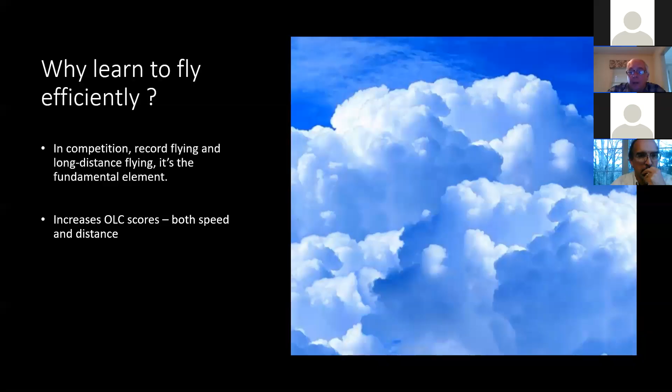Certainly in competition, in record flying, and in long distance flying, being efficient is the single most important thing. Gary Ittner, the American racing pilot, once said that competition flying is simply a process to determine who is the most efficient pilot of the group. In addition, if you're interested in OLC, by flying efficiently you will increase your OLC scores both for speed and distance.

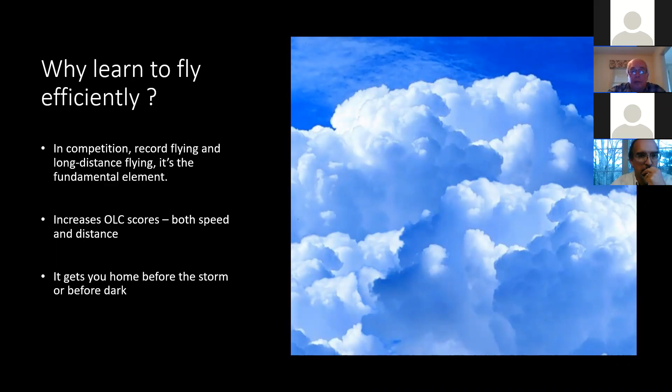Very often when the day is changing, flying efficiently is going to get you home before the storm or before dark. And it gets the most out of your glider and out of the day. I hope you all did read the John Cochrane article where his starting point is maybe you don't need a new glider, you just need to fly yours better and more efficiently.

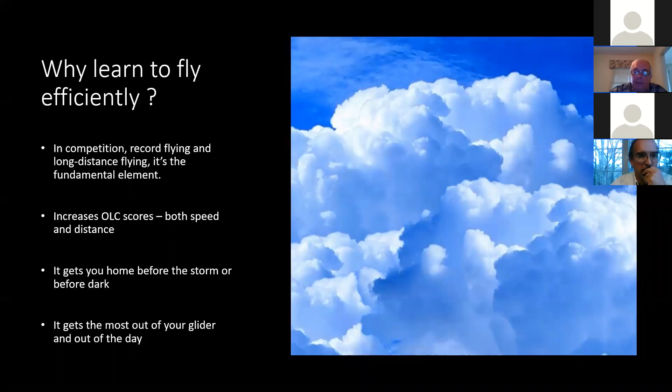Last and most importantly, I think that flying efficiently is a natural component to our sport. We don't want to waste effort or energy. And really, flying efficiently is all about that. My definition of efficiency means just to not waste time or energy. That usually has the result of increasing your cross-country speed. But what we're trying to do is not necessarily maximize our speed, but maximize the efficiency.

So flying efficiently really has very little to do with the actual airspeed that you're going to fly when you're cruising between thermals or cruising on a cloud street. Gliders have a very elegant trade-off, performance for speed, not unlike a car: the faster it goes, the worse its gas mileage is. And one of the things we'll spend the least amount of time on in this program is cruising speeds and speed to fly. I think I've got 2 slides on it.

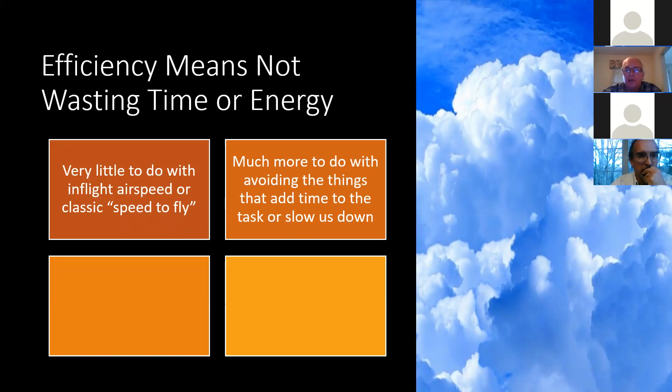Efficiency has a lot more to do with avoiding the things that add time to the task or slow us down. And it has a great amount to do with your pathway through the air. In many respects, you could look at the 2 evenings of this program. Tonight, we're going to drill down to a very fine degree on thermaling and climbing efficiently. And tomorrow night, we're going to drill down on efficiency in cruising and where and how to cruise as efficiently as we can.

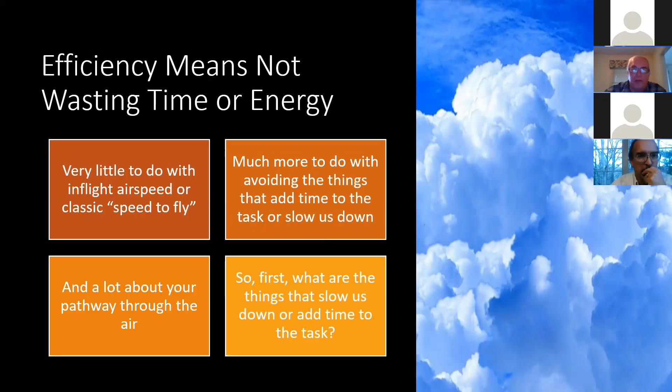But let's talk a little bit about what are the things that slow us down or add time to the task. And there's a quiz at the end of this. There really is. It's a test. So I'm going to give you a bunch of things here that arguably could slow you down in the glider or are inefficient. The first one is deviating course to get to better conditions. Instead of going straight at your turn point, you may go left or right to get to what appear to be better clouds or a cloud street, but that is also going to slow you down, maybe.

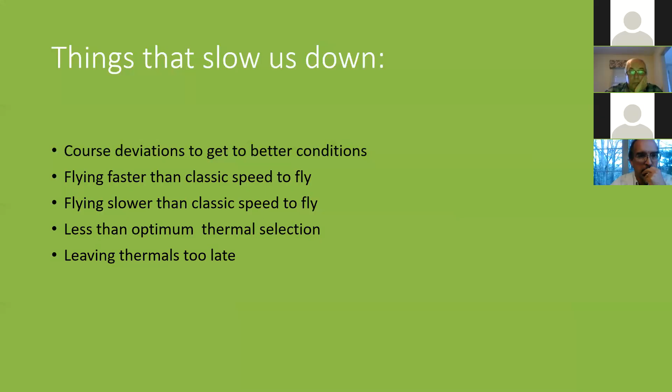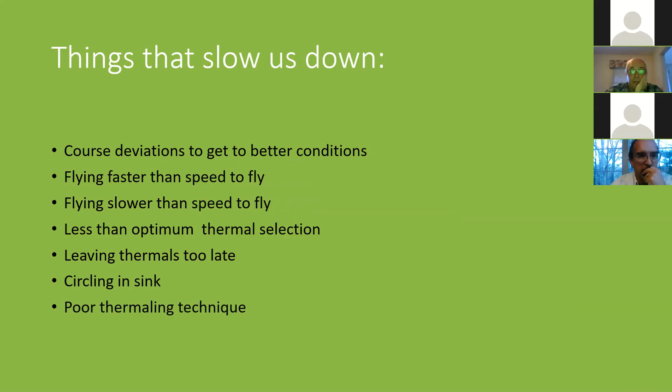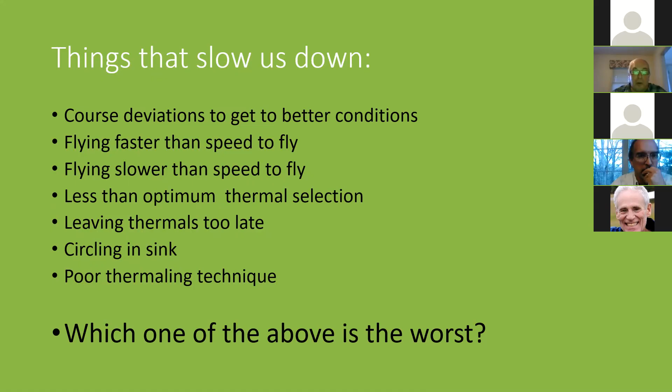Second thing is flying faster than classic speed to fly. Flying slower than classic speed to fly arguably could add time to your task too. Less than optimum thermal selection. Leaving thermals too late. By the way, we're going to talk about all of these things. Circling in sink. Poor thermaling technique. So here comes the quiz. Out of all of these things, which one of the above is the worst? And if you can't pass this test, you ought to take up bowling. Because the easy answer is circling in sink.

But look at the bottom line of this screen. We do it all the time. Now, okay, you're probably right now saying, wait a second, Roy, this doesn't make a lot of sense. I mean, you've got us out here on a Wednesday night telling us something we know not to do. But we're going to talk about this in a different way and in a way that you may not realize.

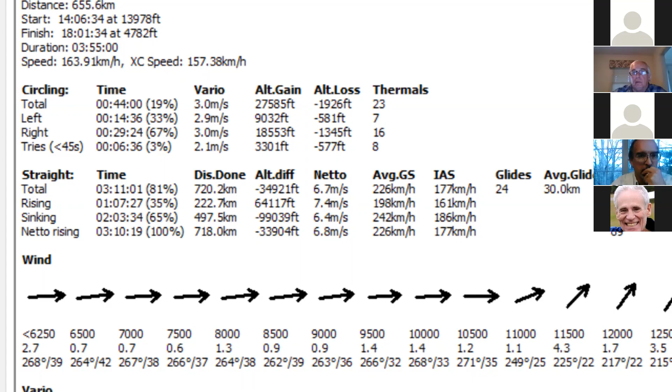I hope all of you are familiar with the SeeYou type flight analysis software. This is an analysis of a flight that I want you to look at with me. And particularly, I want you to look at the pilot's circling performance. He spent 44 minutes exactly circling. He gained 27,585 feet, maybe approximately the height of Mount Everest. But he lost circling 2,000 feet. He circled in sink or in no lift air for 2,000 feet. Now let's look quickly at another flight, if we can.

Let's see if we got it here. Yeah, this one here. Another flight. This pilot flew 1 hour and 4 minutes circling, gained 39,455 feet, and lost 4,062 feet. He circled in sink, losing 4,000 feet.

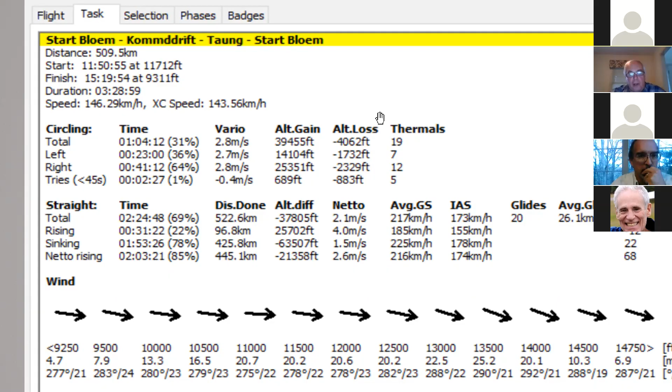Now, maybe these guys are dumb, but maybe they're not. The first flight I just showed you won the Stroukoff Trophy for the fastest flight in the open class nationals in 2018. The guy went 100 miles an hour, at 101.5, 163.9 kph. The second flight is the current United States 500-kilometer triangle speed record for 15 meter.

So if these guys are out there circling in sink for thousands of feet lost, with the efficiency that means, remember, that part of the 39,455 feet, he had to overcome the 4,000 feet that he lost circling in sink. If this is happening to these people, what are we doing at Sterling or your club, you know, on a typical day?

So I wanted to take a look at that, and I took at random some flights that were done out of my club. Here's one here where it's a 15-meter glider flown by a competent cross-country pilot, and his total gain was 29,255, but out of that he had to recover a negative 4,760 feet.

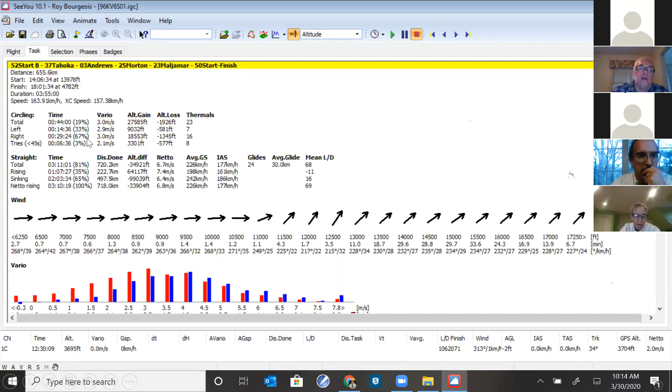Now you see up here in the upper right-hand corner, you're seeing percentage signs. This percentage sign is the percentage of this number in relation to this. In other words, it's what I call the thermaling efficiency ratio. We tend to spend a lot of time talking about the percentage of time circling and try to get that number as low, but it's actually not as important a number as the relationship between circling time in sink and total altitude gain.

So for example, if you look at this flight here, it's 19%, which is pretty good, but the next flight is 31%, but still this guy is going pretty close to 96 miles an hour, 95 miles an hour. But when we get into the club performance, we start to see here at 16%, and we're up at 39% time total circling.

And the next flight is a whopping 26%. This pilot on a cross-country flight had a total climb of 21,535, but out of that amount, 5,700 feet was recovering from the loss of circling. It's as if he was climbing a mountain, and you know, for every 3 steps he took up, he took 1 step down.

So this is something that I've become a fanatic about in my own flying, is not so much worrying about the percentage of time circling, because that's a function of a lot of different things. But the relationship between the time circling in sink and the total time circling is what makes the flight efficient or inefficient. It drives this number. And it's not a surprise that when you look at these 4 flights, you see the efficiency is more driven by this number than anything else.

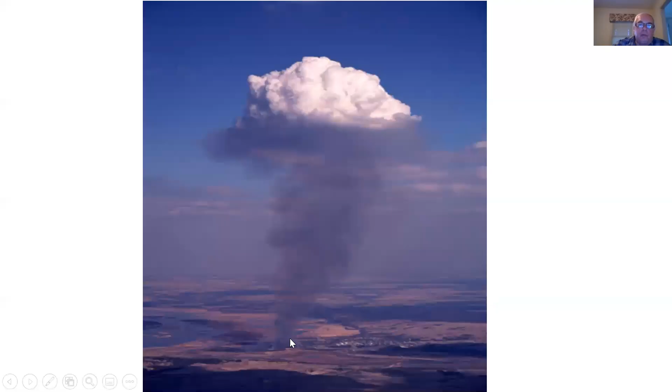Now, some of you remember this photograph from the basic course. It's a stubble fire that shows some important things: the narrowness of the thermal at the bottom, the width at the top, and then part of the basic program was to talk about the sink component, which is coming around and down the sides. It's also important to note that it's roiling or turbulent in this area in two respects. There's a turbulence layer between the still air and the sink, and there's turbulence between the sink and the lift.

Okay, somebody's got an open mic.

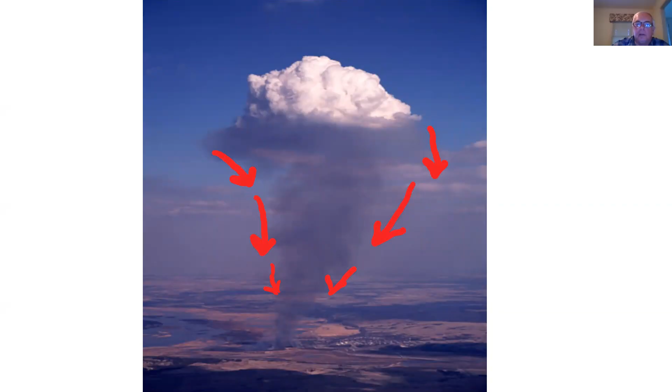Thank you. So also in the basic course, we looked at these items, and we're going to talk about them in more detail in a minute here, but this is a thermal bubble type, which has the sink coming around it. This is the constant flow type thermal, similar to what we just saw in the photograph. And this is the cross section that we talked about in the basic course.

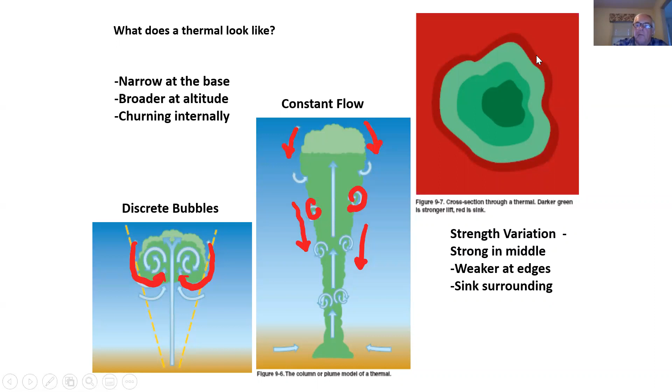And we used it in the basic course because it's helpful in some respects. It shows that the lift area in the thermal can be off-center, and it usually is off-center, and the thermal is surrounded by sink. But there's a problem with that, and that is just as the lift can be uncentered and offset, so can the sink return. Thermals frequently don't look like this with an even layer of sink around them. Sometimes the sink return gets deflected.

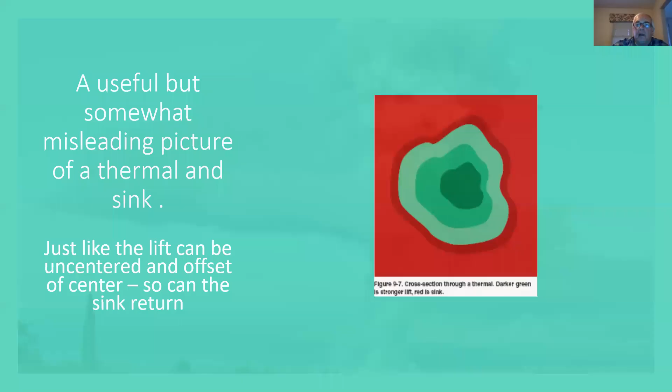So just as the lift portion of the thermal is not uniform, the sink return is not uniform. And to add to the complexity, all three of these things are moving, changing, throbbing, and gyrating all the time in the thermal. The strong lift area is moving, it's changing its shape, and it's moving around in this thing, which is the weaker lift area.

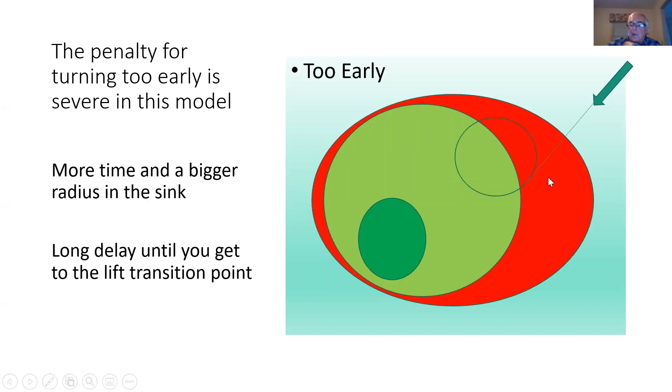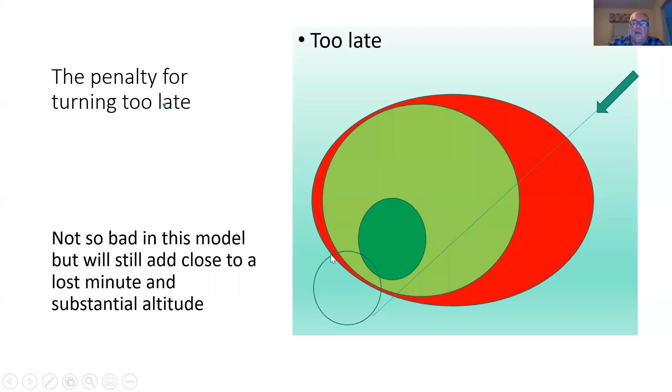Now, we use the same model for an exercise turning too late. And again, out here, at least we're in still air, and all we have is the sink component from the glider's turning polar. But still, this is going to add to our time of circling in sink. The ideal is this, which is to start our turn perfectly and center directly here. Now, this requires a tremendous amount of practice.

People ask me, what can I do to practice to become a better pilot, a better cross-country pilot, a record pilot, a competitive pilot? The answer is what you should practice more than anything else is thermal entry efficiency. Around the airfield, find a thermal, practice coring it quickly and perfectly with no point on the variometer where you're not climbing. If you listen to nothing else from tonight's presentation, read this.

The efficiency in doing thermal entries with no time in sink or no time in still air is the single most important thing you can accomplish. When you're at the airfield and you see these people, like Doug Jacobs and some of the other world champions, and you're trying to figure out, what do they do that's different than me? This is what they do that's different from the rest of us. And that is they pull into these thermals, they find the core immediately, and once they find the core, they rack it up.

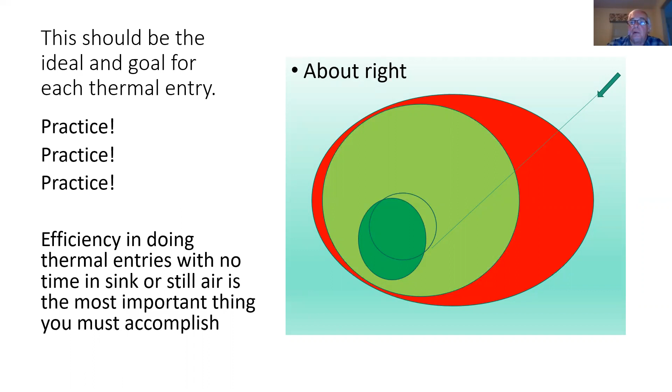Let's look for a second now at the advantage of the same sequence we just went through, but now we're going to circle a little bit tighter. The early turn, if the pilot makes it tighter, notice the radius that he's out here getting hammered in the sink is much smaller. His time out there circling in sink is much shorter.

When in doubt, when you think you're in lift, rack the glider over. Now, there might be a couple of you sitting there saying, well, wait a second, Roy, what about the turning polar of the glider? I saw this article about turning rates and British standard thermals, and it said that you can calculate the optimum circling bank by the glider's polar. To which I say, hogwash, bunk, forget it. We don't care about the glider's turning polar. What we care about is getting the heck out of this sink.

Why do we speed up in sink? We learned that at the very beginning. We speed up in sink because we want to spend less time in it, and the hell with the fact that our polar, as we speed up, is getting worse. We want to spend less time in sink.

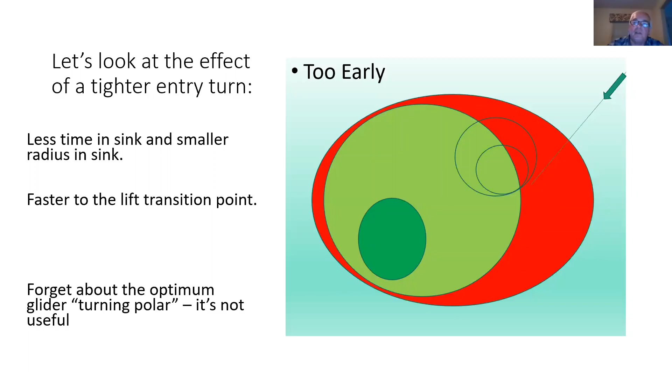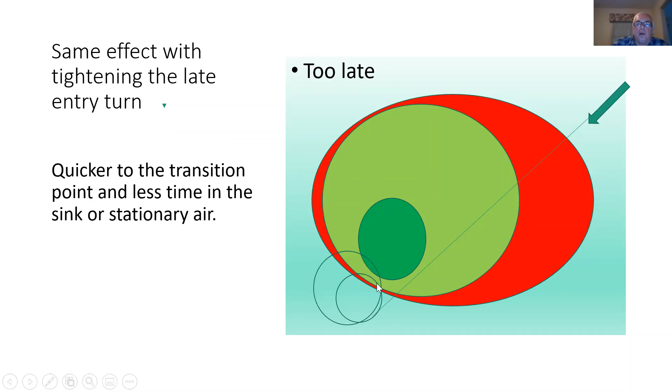So same thing now for our late entry into the thermal. Once again, you can see that there's a benefit, less time spent in the still air. You get quicker to the transition point where you can figure out what's going on. The transition point is where your variometers start to rise, and you start penetrating into this area, because this is what's making the varios rise. You get there quicker. And once again, for our pilot that centered the thermal perfectly, the tight circle gives him or her more time in the strongest area of lift.

Steep turns and steep entry turns, once you know that you're getting into the good area of lift, are fundamental. And when I say steep turns, I mean steep turns. If you are not turning steeper than you think you should, you're probably not turning enough. One thing Doug Jacobs used to teach the juniors was to practice 15-second turns. Now, in John Cochrane's article, he talks about the typical experienced glider pilot circling at about 25 seconds to a turn, which is a pretty steep turn. 15 seconds has the glider pretty much right on its ear.

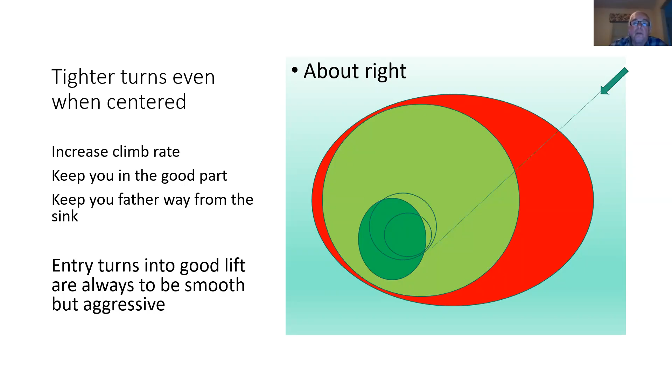But as we've seen in these three examples, circling steeper helps in every situation. Even if you make a mistake, you're likely to spend less time in the mistake area. Now, I want to make two more points before I leave this model. And this is an important thing that I think beginning and even intermediate pilots don't always understand.

When you fly a glider at a tangent to the sink area, it behaves exactly as if you're at a tangent to a thermal. What's going to happen with this glider? Number one, it's going to hit the turbulence that's associated with the boundary layer between the sink and the undisturbed air, that roiling that we saw in the vertical models. And that's going to make your vario bounce and chirp and do all kinds of things. At the same time, the right wing is going to go down, the left wing is going to go up, and it's going to give you the exact signals of a thermal over here.

And if you get suckered into this, you wind up doing one of these. There's no thermal there. Oh, now it's time for my 270-degree correction. And we go down into this crap, and you just get hammered. So we're going to need to find a way to deal with this, and we're going to talk in a minute about it. But it's always important to ask yourself, what am I seeing here? What made that wing go up? Well, the answer is, in this situation, it was the sink that made the other wing go down. But this is something we're going to tell you how to deal with in a minute or two.

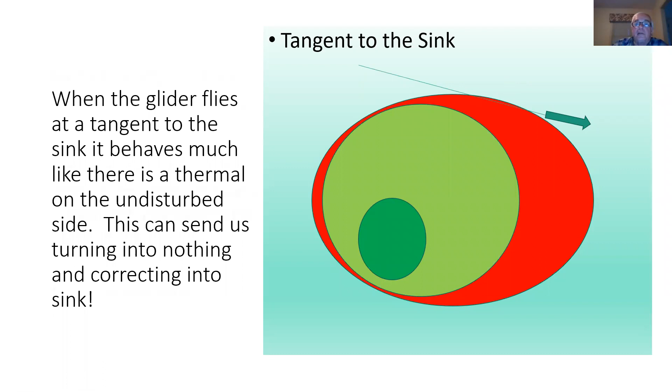The second thing I want you to look at is the implications of this kind of model for so-called dolphin-style flying. Dolphin-style flying is when you pull up and slow the glider dramatically in the thermal and fly slow and go straight across. Well, okay, so our glider here is, let's say, cruising at 70 knots and pulls up here to 45 knots. And you're enjoying the fact that you're climbing, but then you get out here, and now you're 45 knots, and you're getting hammered in the sink. You're slow in the sink, and you lose, by being slow in the sink, everything that you gained here.

We're going to talk a little more about this later on. But slowing up in lift means that you're going to be slow going across the sink that surrounds it, and it's usually a waste of time, and sometimes it's a net negative. Okay.

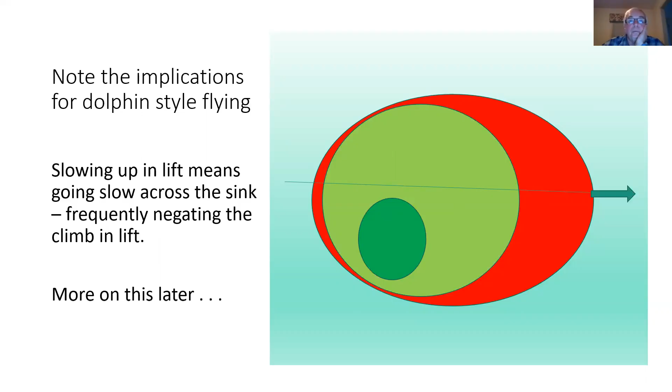So what we've got to do is change our techniques, and we're also going to have to change our thinking. So let's talk first about techniques. We've already seen the need and the benefit of perfect entry turn timing and tighter entry turns. That's what we've got to practice. That's what we're going to get good at.

Every thermal we want to do perfectly. We never want to see that variometer needle dip or duck down. It should be a constant rise right in, and then we're thermaling steeply and going up. We've also seen here, I hope, the benefit of Cochrane's suggestion that thermals should be selected based on how easy they're going to be to center, and not necessarily on the initial vario pulse.

This idea of Cochrane's helped me immensely. It was a big change in my flying, and I still do it. I come into a thermal, and if the glider is surging all around me, the wings are flexing, I'm pressing down in the seat, and I know I'm right in the middle of it, fine, that's going to be an easy thermal to center. But if I'm getting bounced around and the vario is scooting all around from one stop to another, that's not going to be a thermal that's easy to center, and I'm not going to chase it.

During that 60-degree turn, we get hyper alert, and we're looking at everything. First, and most important, even more important than the vario, is as I turn into the thermal, during that first 60 degrees phase, is the glider loading up? And by loading up, I mean, can I feel the wings flexing? There's 3/4 of a ton of mass that I'm strapped to, and it creaks and groans and stretches when it starts to lift. And I want to feel if that's happening.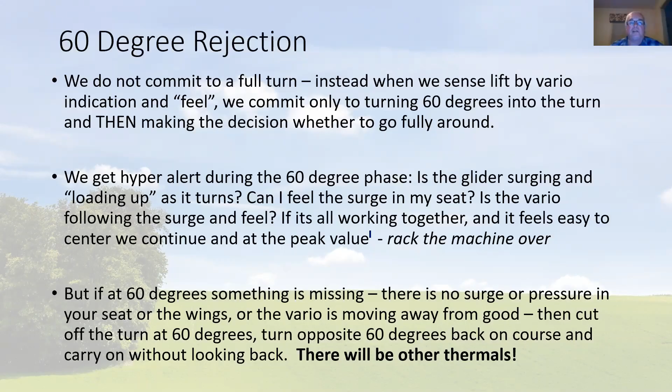So it looks kind of like this. This is our thermal, and we're coming on this way, and something happens, but we're a little late, and we start the turn, and nothing's there, so I'm gone. I just keep going. Similarly, coming up this way. 60 degrees, and I'm gone.

And I do this in all of my flying. I think everybody does. Everybody who's really studied this recognizes that the most important decisions you make are the thermals you reject, because the thermals that you reject are the ones that are going to take your time, they're going to kill your efficiency, and you're going to wind up spending time circling in sink or in nothingness. And this strategy is important.

It takes a mindset change, because in the beginning, we're suckers for thermals. And we start, and they tease us, and we wind up spending all kinds of time fooling around with them. And there are 20 other good ones out there. So we've got to learn to change our decision making a little bit.

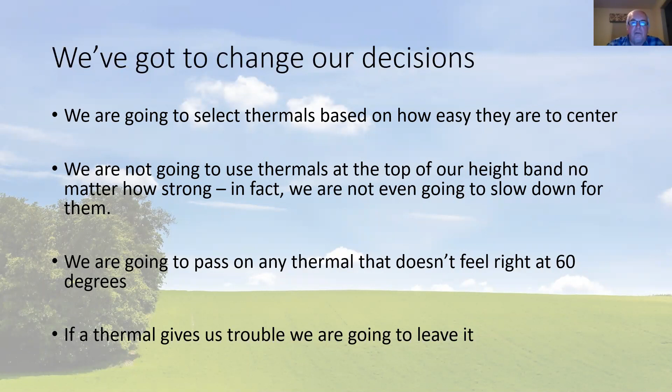We've got to change our thinking. We tend to think of thermals like a life preserver and we're drowning and we're going to grab onto it no matter what. That way is inefficient. That thinking is the cause of inefficiency. A thermal is just a foothold as we're climbing the mountain, and we're going to use it while we need it, and then we're going to move on to the next one.

And anytime a thermal starts to weaken, we're going to leave it. We're going to leave by passing across the lift area, gaining speed. We'll talk about this more in a minute. And we are always going to know the exit direction and pass along the lift in that direction.

How many people, we can't even have raised hands here because we're doing this online, have been in the situation where you get so wrapped up in the thermal, now we get close to the cloud base and it's like, okay, which way do I go? Which way was my course? You know, your compass is spinning like a top, and you can't really see much except straight down at the ground. The big cloud you wanted to aim at, you can't see anymore. So there's a trick to doing this, and we're going to talk about that in a second.

Lastly, we never go back to look for a thermal we lost. Never, ever, even when we're low. Now, if we're frightfully low, we're down at the bottom of our height band, we're in survival mode, we're not going to leave zero sink. We're not going to leave a thermal. But if we've lost it, we're going to go find another one. We're not going to go back and look for that one, because 9 times out of 10, the reason you lost it is it was a bubble and now you're below it. Okay. Leave by passing across the lift area, gaining speed.

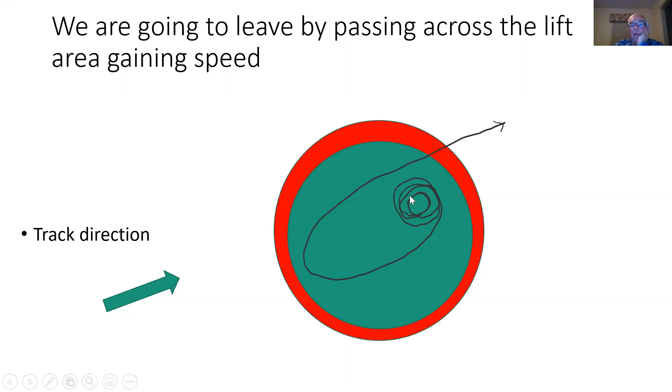So what you're doing is as you're climbing, as you get into the mid-level of where you're climbing, you know what your exit direction is going to be. You're selecting your next cloud, your next area. And we're going to talk more about this tomorrow night. You pick your next place to go, but you mark it by means of something on the ground because that's all you're going to be able to see.

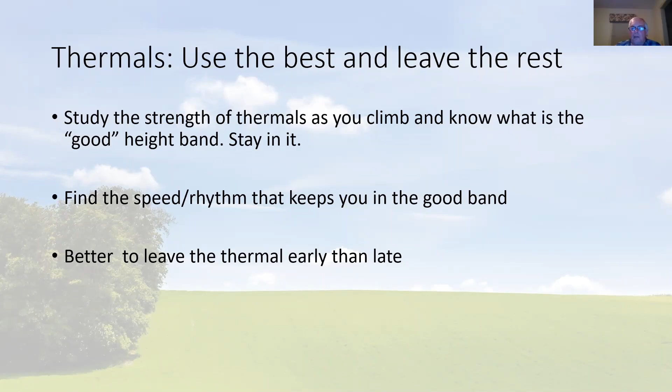And the thermals were going to 15, 16,000 feet. But I wasn't. I was cutting off the climbs at 12, 12.5, and just banging out there. And what happened was, of course, the piece of thermals that I was consistently using was better than the aggregate pieces of thermal that everybody else was using. And I was just that much faster. So there really is very little penalty to leaving the thermal early.

Lastly, and this is important, when you're doing a task and you've been far away from home, there's a tremendous temptation to milk a thermal to force the final glide. You've been hitting 5, 6, 7 knot thermals all day. But the thermals are beginning to taper off at 5,500 feet. So all of a sudden you realize, hey, wait a second, if I can just get another 1,000 feet, I can get to 6,500 feet, even in the weak lift, I've got final glide.

That is a big mistake. It's inefficient. You spend too much time trying to milk out that last 1,000 feet. And more importantly, what's going to happen in that final glide is you're going to fly through 4 great thermals, tremendous thermals, and you can't use them because you're on final glide. So let the final glide come to you naturally. Just keep doing what you've been doing, and all of a sudden, hey, I'm on final glide, and bring the machine home.

Lastly, as I said, change the acceptable range for thermals as you get lower. We're still not going to fool around with difficult to center thermals when we're low, but the acceptable range of thermals, as we get into the bottom of our height band, obviously we get into the beggars can't be choosers department, but you got to be tough as nails when you're up at the top.

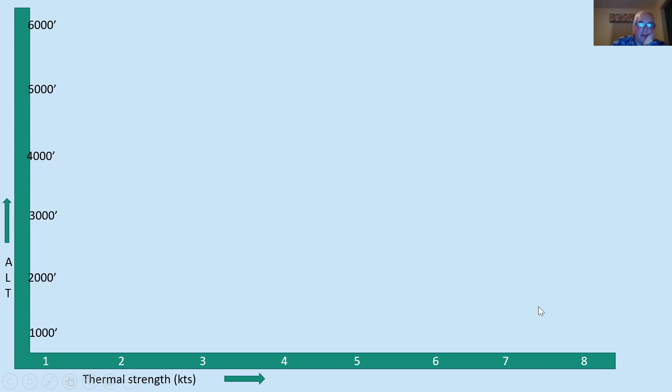Now, there's a myth, and it is a myth, that thermal strength is linear. And we think that a 4 knot thermal, on a 4 knot day, leaves the Earth at 4 knots and it continues up at 4 knots, and it stays at 4 knots until it gets to 6,000 feet of cloud base. But that's not what really happens. Remember that the speed of the thermal is a function of the temperature difference between the thermal and its surrounding air. As the temperature difference gets greater, the thermal grows faster and stronger.

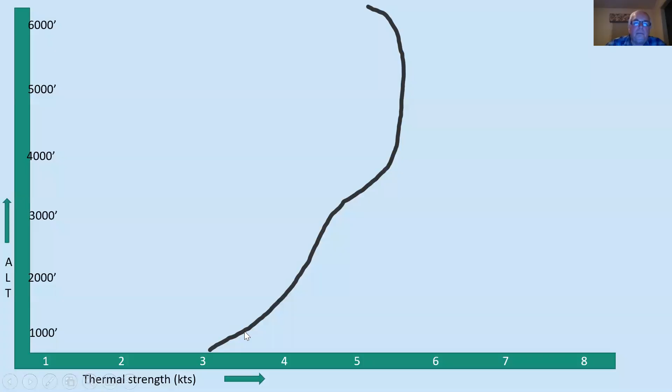We read Skew-T charts and we think that the temperature drop-off is linear, but it's not. What actually happens is we have some inversion and residual inversion from the day down in here, and we have tongues of pretty cool air up here. So the growth of the thermal actually looks a lot more like this, whereas at 1,000 feet, the thermal strength is so-so. It wanders up here to 4 knots, and then it starts to pick up a little bit, and then it hits a band of cold air, and it really pops out. And then up here, it begins to drop off, and the cloud base is up here somewhere.

There's a lot of important things that come from this sketch. Number one, this explains why you shift gears in the kind of thermal that you're going to use when you get low. I mean, it's great to have these 5.5 knot thermals up here, right? But the bad news is when you're at 1,500 feet or 2,000 feet, they don't exist. And it's the same thermal, it's just that it grows in strength as it gets higher.

The second thing that's important to recognize is that you can learn this. You learn it by measuring every thermal that you climb in. And you're tracking how your climb is going, and you're adding to your knowledge base about the day, about how thermals are going to grow this day, and where the good band is.

As the day wears on and the heating in the fetch area increases, the thermal strength increases, but even when it increases, it looks like this. The shape of this XY table will stay the same because there's a tongue of cold air here that's making this thermal really rise at this strength, +7. There's residual inversion down here that's making it kind of poke around. So once we learn this, it's extremely valuable.

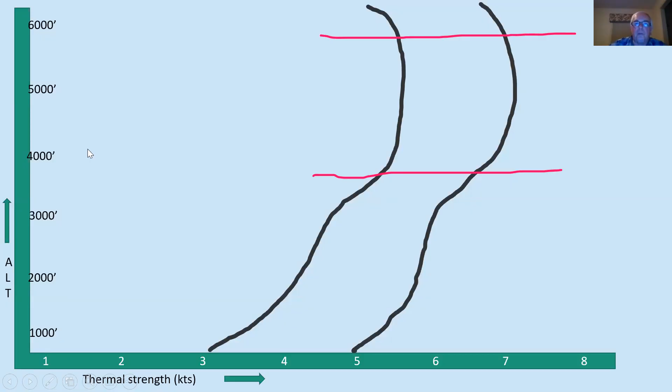But let me explain that tomorrow night's session is going to be not so much about thermaling, but about pathways through the air, finding energy lines, more than just cloud streets, connecting pathways, when to divert, when not to divert, and how to change the L over D of your glider to twice what it can be if you're going in air that's even going up a little bit.

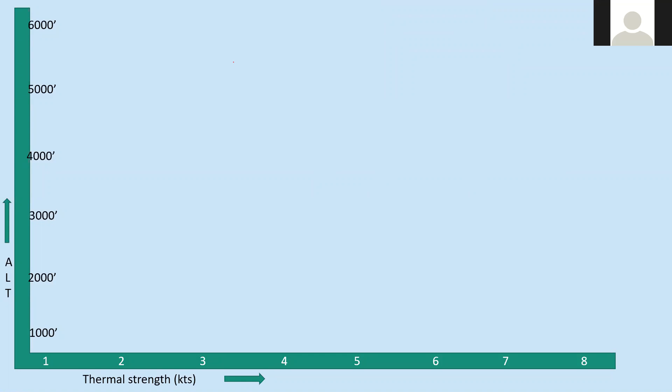So, Rick, let me stop here and we can maybe field some questions. Sure. I've got one that came a little earlier, which was how often do you skip thermals and just fly straight through? Do you have sort of a percentage of thermal attempts? Yeah, well, let me answer that the way I answered it before.

Every thermal is a risk-benefit analysis. There is always a risk of circling in sink. There is always the reality that I'm not progressing towards my goal anymore. I'm turning away, I'm standing still. And so I go through a risk-benefit analysis. Do I need this thermal? Do I think it's a good thermal? Is there a bird out there circling that thinks it's a good thermal? Is there a racing pilot that really knows what they're doing in that thermal?

How high am I? How close to cloud base? How much am I going to climb? Am I at a comfortable point in my height band? Do I need it? What's out ahead of me? Is there a big fat building cloud that every time I look at it keeps getting bigger and bigger? These are all the questions that I'm analyzing every time I'm thinking about a thermal.

And so the answer to how often do I thermal versus how often do I pass them up is the result of that risk-benefit analysis that I'm doing every time. So if I'm up at the top of my height band, it's got to be the greatest thermal ever made for me to slow down and take the risk of circling in sink. But if I'm getting towards the lower part of the height band, then I'm not so choosy anymore.